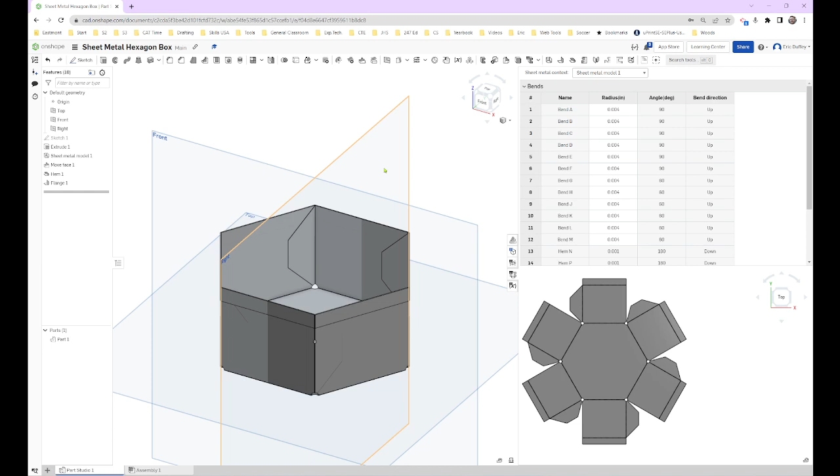Here it is. Here's the end game. Well, not the end game, close to the end game. So I'm just going to do an overview of how you make this thing. If I scroll back to the beginning, let's take a look at my first sketch.

I just made a hexagon. So there's a tool right here. We can do an circumscribed polygon and change it to 6 sides. And then from one side to the other is 3 inches, right?

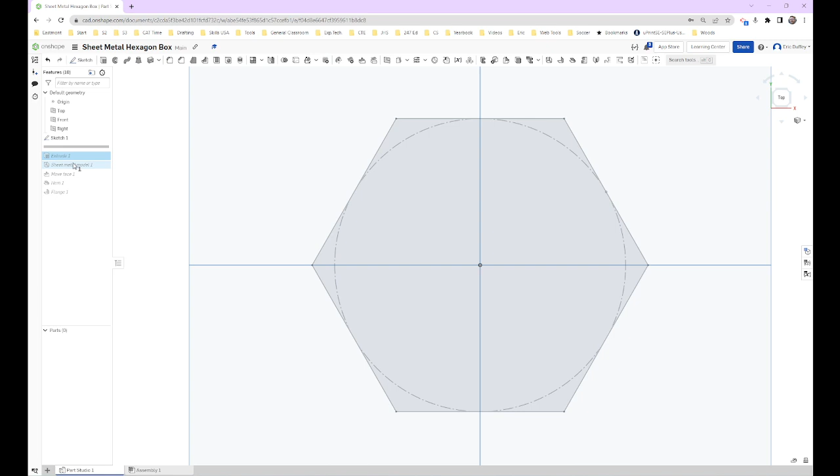Then from there, I take a look at my extrude. Oh, let's go all the way to the end, and then we'll take it step by step. So then my extrude, I made it 1.5 inches on the thickness, all the way up. Then I turn it into sheet metal.

A couple key things on here. Our bend radius should be 0.004, 4 thousandths of an inch. This is the thickness of paper. We're going to cut this out of paper. That's our pretend sheet metal. And then our thickness right there again is 4 thousandths of an inch.

The relief under here, we got to go to rounded and sized, and then make sure that it is 1/8 inch. And that's the holes in the corners. That's what it's creating right there. Also, on the faces to exclude up here, I should have backed up to that. I clicked on the very top.

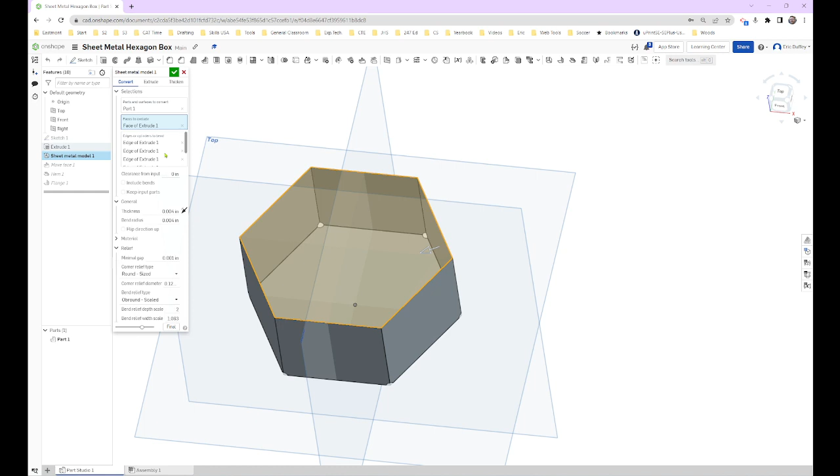That'll hollow it out. And then on the cylinders, this is where we bend on the edges of all of these. So this is where we're actually folding the paper up. These are not folded right here. And so these will all lay out flat. And we'll go green checkbox on that.

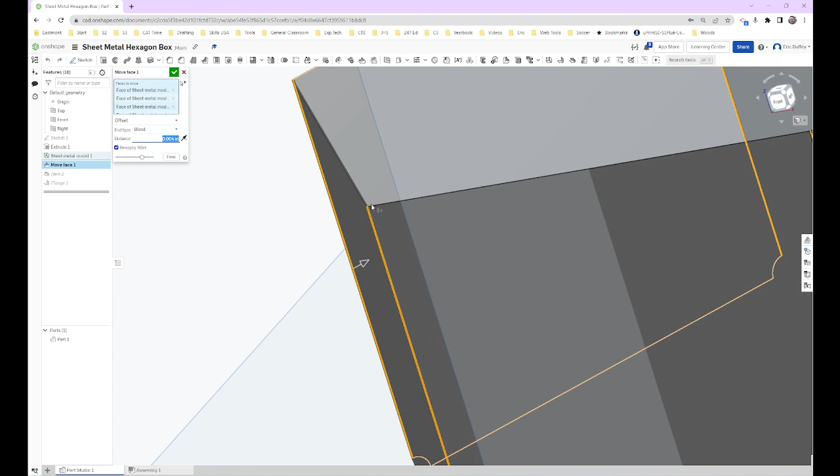Our next step is we've got to move each one of these faces in the thickness of the paper. Otherwise, it runs into itself when we try and fold. And so we're going to back those up. You can see I use the move face tool, which is right there. So move face tool, and we're going back the thickness of the paper, 0.004.

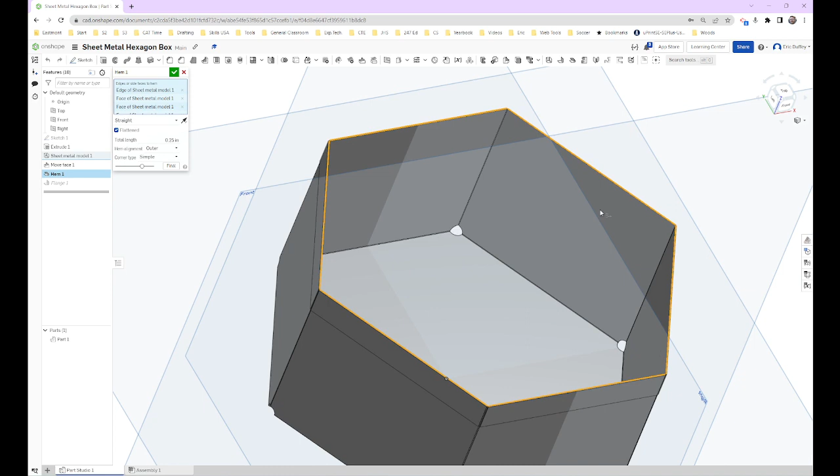And then we hem it first. And so I click on the top edge on each one of those. And that's what's creating this bend around the top. So we're going to fold those over, and the length of it is a 1/4 inch, right? 0.25.

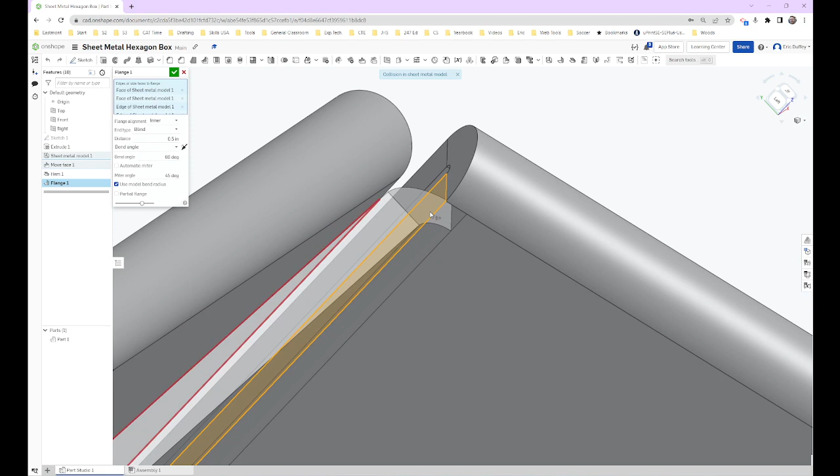Then lastly, this is where we get the flange. That's our inside piece right here. And it's going to turn red. We're going to ignore it because it's going to work fine. It has to do with the hem and how it's being folded, and it's got like a weird thing right there. It's not going to affect our final, so we're going to be good. It says there's a collision with it. We're just going to ignore it.

But what I selected on each one of these is the inside face, the one we shortened, and then that'll bend it to the inside for us, okay? And then our bend angle is 60 degrees. That's between these two sheets, 60 degrees.

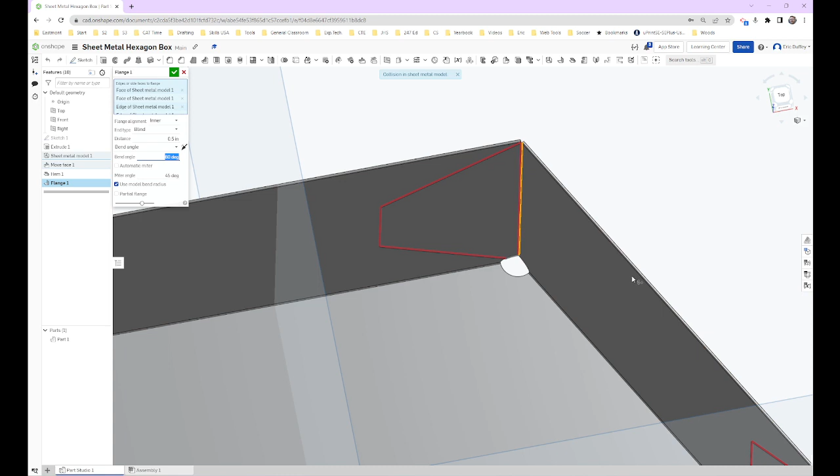And then right here, the miter angle, that's the angle coming up this way. That's 45 degrees on each of those. So those are the settings we need. And then we get it all good. Beautiful. It's all there. We can take a look right here if we click on our sheet metal table and flat view. So this is what it looks like all unfolded.

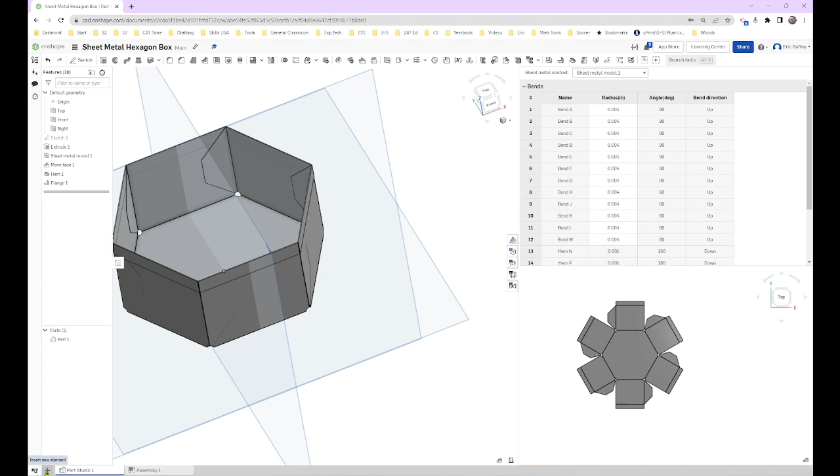Okay. And so we're going to punch those corners out. We're going to cut it out. We're going to assemble this thing after the fact. We're going to print it. To get it ready for the printer, I'm going to go ahead and push plus sign and create a drawing. We're going to keep it on ANSI A paper. Say OK.

When it pulls up, I'm going to push escape right away because I don't want any of this. I just want to delete it all so that we just have a clean piece. I'm going to go insert new, and right here with flat patterns. Rather than one of the views of the part, we're going to go flat pattern, and flat pattern of part 1. When we put it on here, we want to make sure we're 1:1 scale.

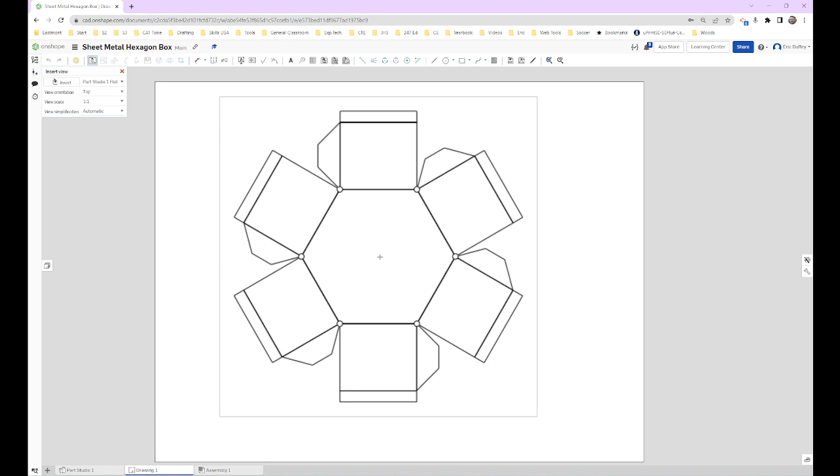And we're looking at the top view so I see everything. And we're good to go there. And our last step, or a couple last steps, I'm going to right click on this. I'm going to show/hide the bend notes because I don't want all that extra lettering on there. And then I'm going to go notes.

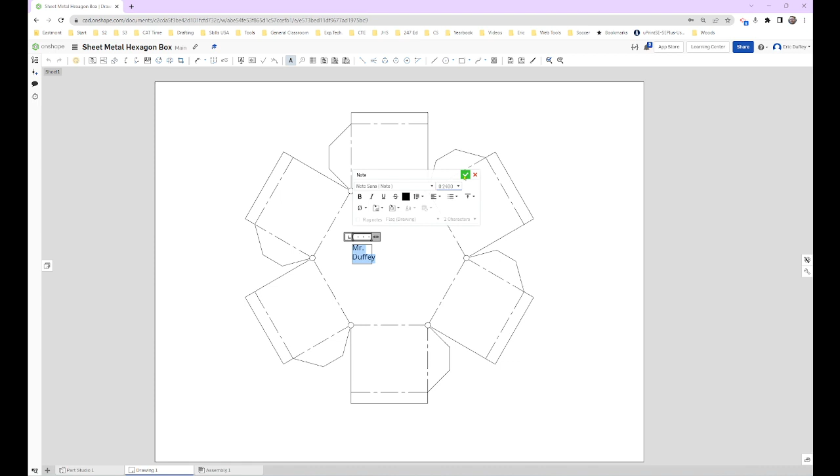I'm going to put my name on this, Mr. Duffey. Okay. And you can make it bigger if you want. Let's double the size of it. I'm going to go 0.24. Tab. Beautiful. All right, there it is.

Now you just need to export a PDF. Export, not a DWG. I want a PDF this time around. Export it. It's going to download. Then you need to email that to Mr. Duffey. He'll print it out. And then you can cut it up, assemble, and we'll need a picture before you turn it in.